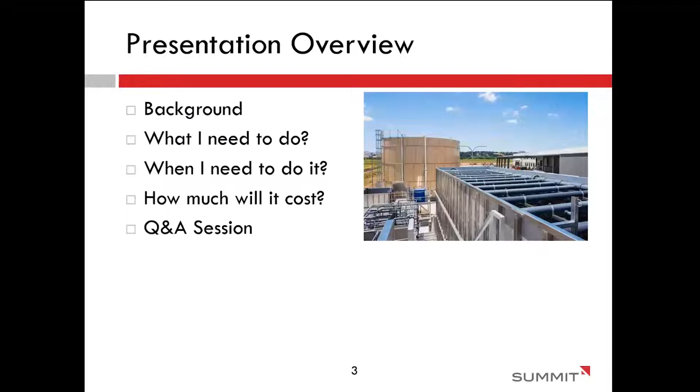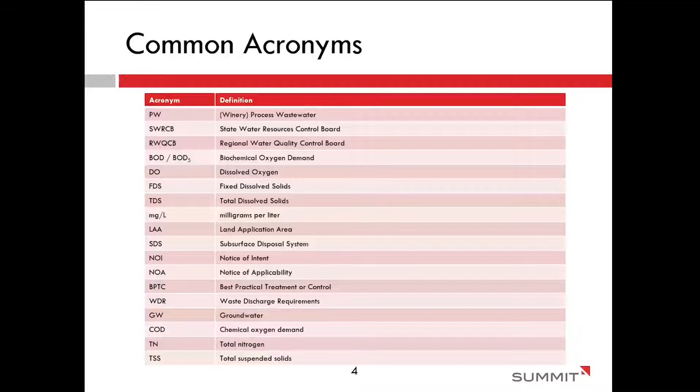So to start, one of the biggest things with understanding the impacts of this general order is knowing where you fall within the tier structure that the state has defined. So facilities need to have a good understanding of what their annual wastewater production volume is, whether that's calculated based on production volume, whether it's measured with flow meters. Somehow we need to define what that annual PW generation is or is going to be in the near future.

So the state has broken up the tiers into 4 different tiers with the addition of an exempt category. So if you produce less than 10,000 gallons of process wastewater each year, you're exempt and do not need to enroll in the general order. And then depending on if you're tier 1, 2, 3, or 4, that will define what your compliance might look like, what your monitoring and reporting will look like. So we need to get a good handle on what category you'd fall into.

Keeping in mind that your process wastewater volume also needs to include stormwater collected and sent to the wastewater system. The state wants to look at that cumulative volume of wastewater and stormwater. If you don't have flow measurement for all of the wastewater going to your pond or your subsurface system or to land application, we will need to understand where you're collecting stormwater so that we can estimate those volumes and help classify which tier you're in.

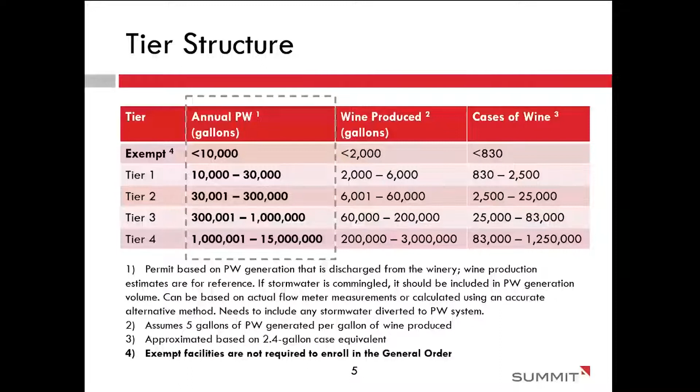And just emphasizing here that the state is only interested in the wastewater volume, right? But we've added columns on this slide to show the correlation to wine production and cases of wine, because most winery facilities talk in terms of wine production and/or cases of wine.

So the next few slides, I'll talk about the typical type of wastewater systems that are regulated by this general order. So many facilities have existing ponds. I don't see as many new ponds going in, but they are still a feasible treatment option.

So for pond systems, the state is looking for us to determine the pond capacity and show what the capacity is by means of a water balance. So they want us to look at wastewater generated, evaporation out of the pond, precipitation into the pond, and just the overall wastewater water balance to determine if your pond has the capacity to accommodate a 24-hour 100-year storm and can handle the wastewater influent into that pond.

For existing ponds, the state will allow tier 1 and tier 2 facilities to maintain their ponds as is. If you fall into tier 3 or 4, you'll need to demonstrate that your liner meets permeability specs. If your pond was installed less than 10 years ago, you could provide construction drawings, geotechnical information to demonstrate that you meet that requirement. Otherwise, they'll require a performance test if your ponds are older than that. So you'll have to do geotechnical boring testing if you have a clay liner or perhaps a concrete liner.

Synthetic liners, if you have a synthetic liner that's greater than 10 years old, you'll need to show that the liner is not leaking. For new ponds, similarly, you'll need to demonstrate you meet that storm capacity, the 24-hour 100-year storm, and you'll need to show that you're meeting the liner requirement with clay, concrete, or a synthetic liner.

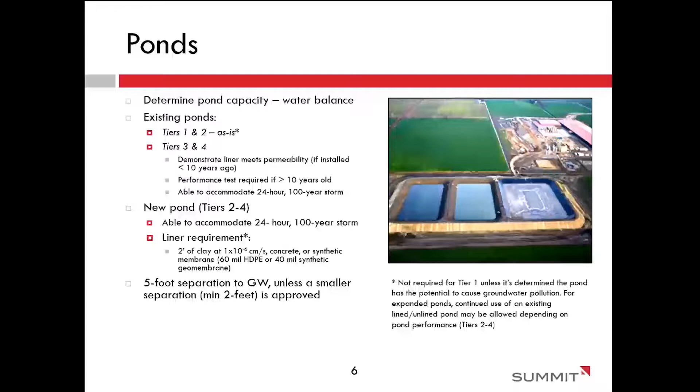So from a pond or from a package system, or possibly for some facilities, you may go straight to land application. So land application areas are regulated by the general order, and the state does not have any specific hydraulic limits. They just ask for good irrigation practices. That's kind of an ambiguous term, but in our technical report, we'll need to demonstrate what the irrigation practice or cycle is for your land application area.

You know, what's your total acreage? How is it split up? How many days will it take to cycle through irrigation of your entire land application area? What the state is looking for is that you're meeting the BOD loading criteria and that irrigation cycle average limit is no more than 100 pounds per acre per day.

One of the interesting things with the requirements of this order is that in a lot of cases, if you have the land area, you can irrigate raw winery influent on land if you're spreading it out over a large enough area. However, you need to demonstrate that it's not ponding or running off, it's not creating nuisances. And in many cases, that wastewater is used for irrigation of vineyard. And so while it may be allowed by the state, it's not necessarily best practice from a vineyard irrigation and health standpoint.

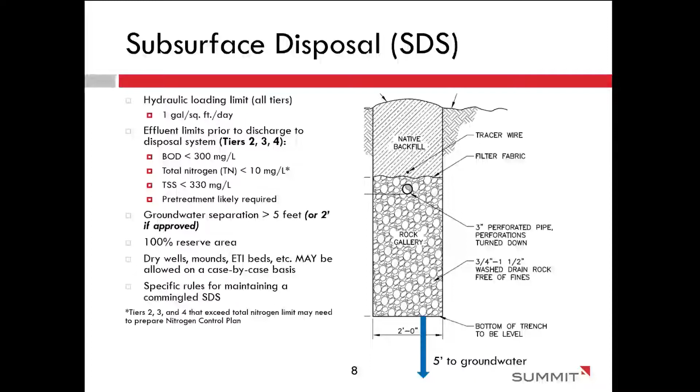What do you need to do? So there's a series of things that we would recommend you do to prepare for enrollment. So the first thing we'd recommend is collecting wastewater generation and water quality data. So you can do that by means of installing flow meters. We can help you determine where you should put in a flow meter so that you can better track your wastewater generation rather than have it be based on estimates, because every facility has different processes and water use goals, or just people operate their facilities differently.

And so having data that demonstrates what your actual usage is going to be the most useful for determining what you need to do to comply and which tier you'll fall into. Similarly, collecting water quality data up front to know what the implications are is a recommendation of ours. It's not a requirement by the state, but that way you can go into enrollment with your eyes wide open about what this looks like for your facility. And I'll go over some more details in another slide. Tier determination, like I mentioned previously, it's tied to your production, not your entitlement.

So if you are producing half of what your entitlement allows, you will only need to demonstrate your wastewater generation tied to your current production.

The next step, aside from collecting data, is to assess the capacity and compliance of your pond, your LAA, or your SDS. And we can help with that, looking at the data, looking at existing drawings, coming out and visiting the site to determine, well, how do things look? Where are you compliance-wise with each of those systems and the requirements, and what do you need to do in order to be in compliance and be prepared and budget properly for compliance?

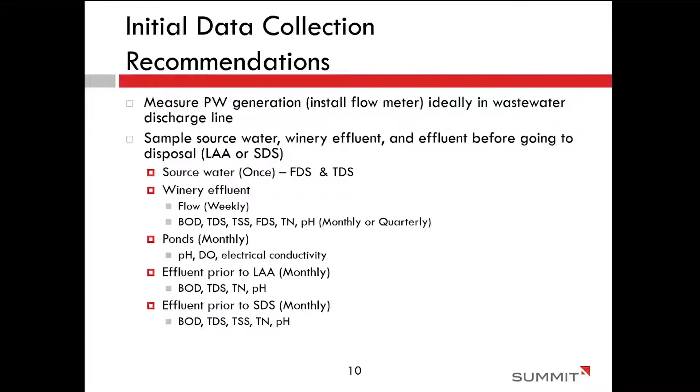Monitoring wells are another big component because the state is asking for us to speak to the groundwater quality, and we can't do that if we don't have monitoring wells. So most facilities likely don't have monitoring wells, and so there's going to be a portion of compliance that requires installation of these wells. And so how many and where? That's going to help you understand what the costs are. How many and where is going to be dependent on the type of system you have, how big it is, what the topography is like.

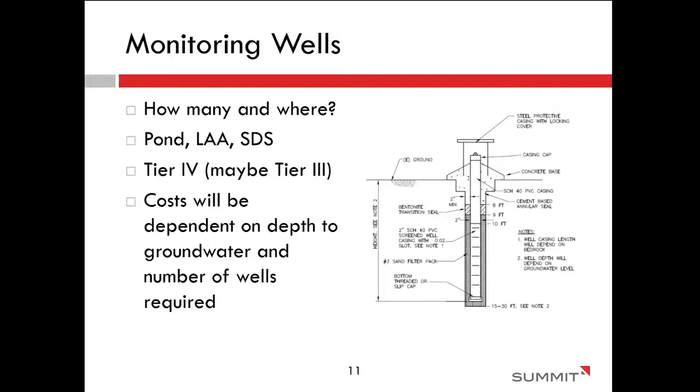So again, reach out to us with specific questions and we can look at your site and the layout and give recommendations on how we think the state will interpret the monitoring well requirement. And if you'll need 2, 3, 4, we can look up what the theoretical depth of groundwater is if there isn't geotechnical information, to better understand and give you estimates on what the cost to install these wells will be.

When do I need to do it? So that is the big question for a lot of people. So if you're an existing winery, you don't have any waste discharge requirements or any existing permits through the county or state for discharge of your wastewater, you need to submit an NOI and technical report by January 20th, 2024. And then your technical report must address how you're going to comply with this general order within 5 years of the state issuing the notice of applicability.

If you're a facility that has an existing WDR or a conditional waiver or a permit through Napa County, a local permit through an MOU, you need to submit your NOI and technical report by expiration of that existing WDR. If you have a permit through an MOU, that's a little ambiguous because you're renewing that permit annually. So I don't know if the state has clearly defined, does that permit expire annually, or how are they going to interpret that? I think that they have a lot of people they need to get enrolled before they come after the people that have those annual permits. But just letting you know that the requirement for enrollment of facilities, specifically in Napa, is a little bit ambiguous.

And kind of going on a segue, per Kim Withrow, the state and Napa County are still working out their MOU. The state has issued a draft MOU to Napa County. They provided comments and now they're waiting for the state to come back to them. So Napa County still has the intent of being the local jurisdiction or providing oversight for implementing the general order. And so they're going down that path, but as most things within the state, it's just taking a while.

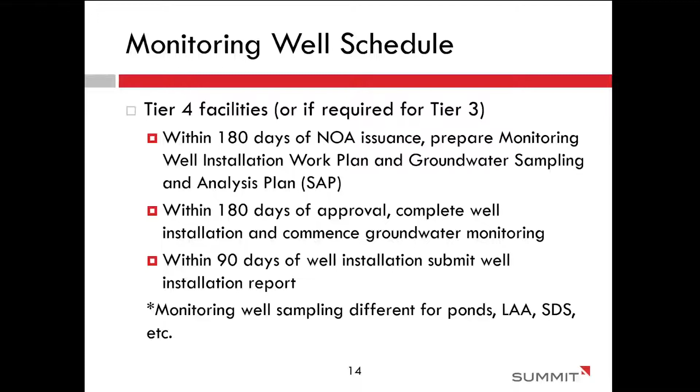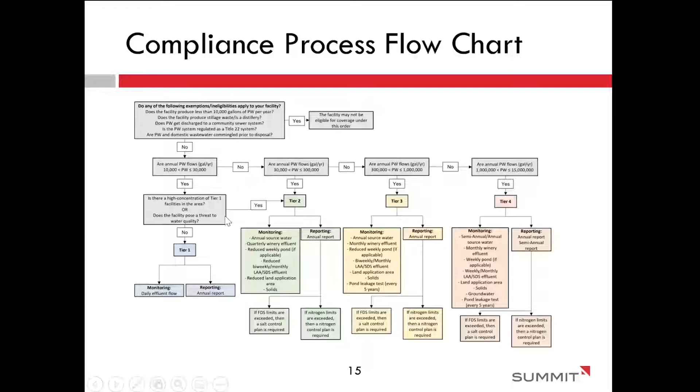Okay, salt control plans. So this will be a requirement potentially if you are showing exceedance of FDS, and it applies to land application areas or subsurface disposal systems. So this new general order prohibits water softener regeneration brine from being discharged to your LAA or your SDS. They do, however, allow RO or boiler blowdown backwash to go to the wastewater system because it's not providing additive salts that are then getting into groundwater.

As part of the technical report and ongoing monitoring, you'll need to demonstrate that your source water plus your effluent is not adding more than 320 milligrams per liter of FDS to your source water, and you'll have to monitor that 2 times per year. And then if you do have exceedances of FDS, then this may trigger a salt control plan within a year, or you'll need to demonstrate that you're involved in another sustainability program or CV Salts.

CV Salts is a program within the Central Valley because of their groundwater and salt and high TDS level situation. So CV Salts would only apply to facilities in the Central Valley. But if there become other sustainability programs in other regions of California, that could be an option.

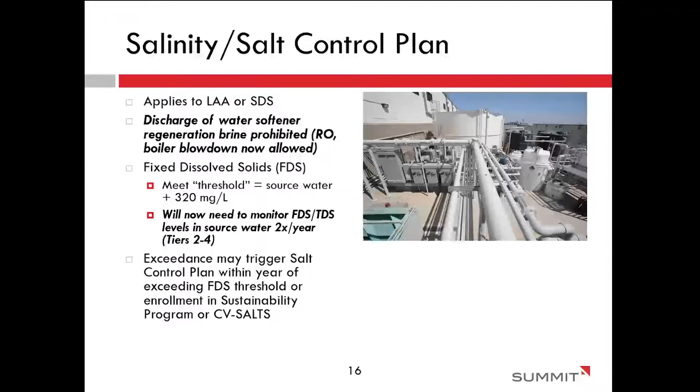Similarly, nitrogen. So there are nitrogen limits on the effluent that's sent to land application and subsurface disposal systems for tiers 2, 3, and 4. Your nitrogen levels in an SDS system need to be less than 10 milligrams per liter. And for LAA, if there is a demonstrated impact to groundwater, then you may need to prepare a nitrogen control plan for an LAA.

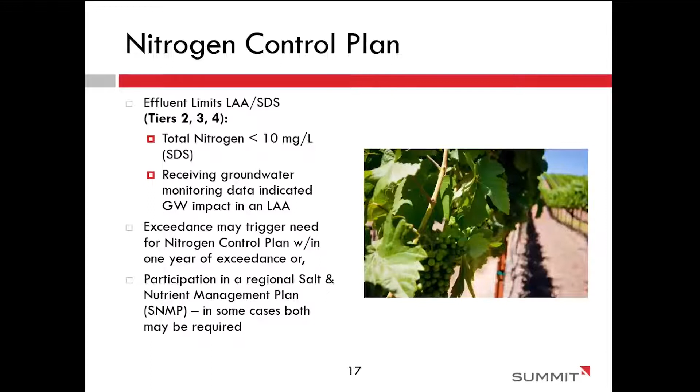Similarly to salt, if you do have an exceedance, an alternative to the control plan would be participation in a regional salt nutrient management plan. But at the present time, I'm not aware of any of those.

Compliance-wise, these are kind of the steps for compliance. You submit an NOI and a technical report. The state is supposed to respond within 180 days. We'll see once people start applying what that actual response time is. Once the state responds and hopefully issues their notice of applicability in response to the application, they'll provide the tier determination, they'll provide the monitoring and reporting program, and then they'll provide an approval on your timeline for compliance.

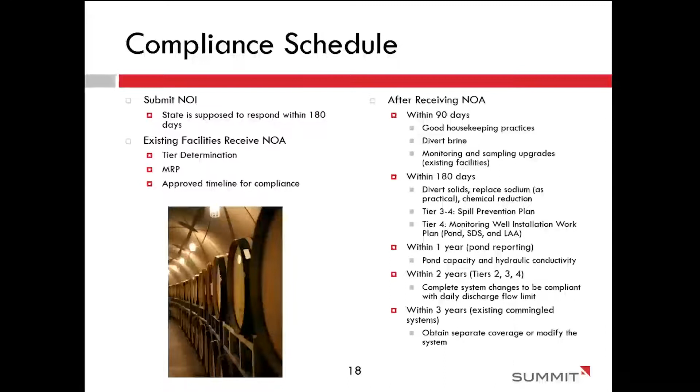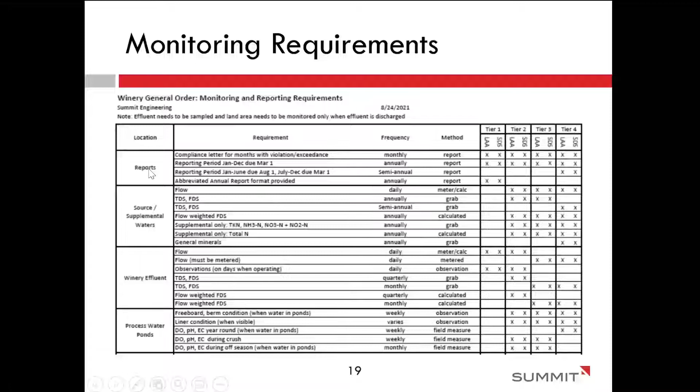In general, monitoring and reporting. So for groundwater monitoring, if you are tier 3 or tier 4 and you want to request an exemption because you can demonstrate you're not degrading groundwater quality, you need to include that request in your application. Overall reporting. So if there's an exceedance of some kind, you'll have compliance letters. Otherwise, you'll have semi-annual reports for tier 4 and only annual reports for tiers 1 through 4.

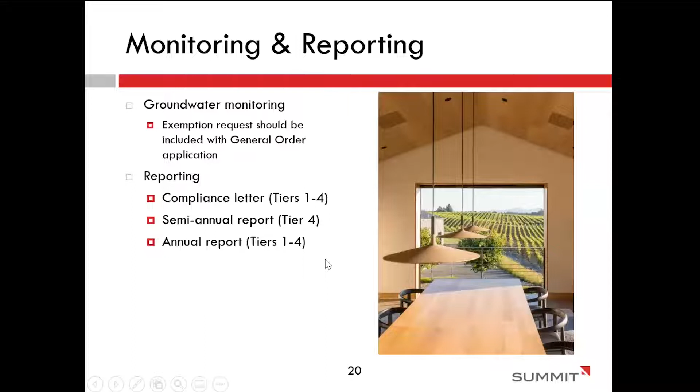How much will it cost? I think everybody is interested in how much this will cost because it's pretty substantial in a lot of cases for facilities. So the costs include capital improvements. What are you going to need to do to improve your system to be compliant? Monitoring well installation if that's needed.

We can help put together estimates for all of the capital improvements, including groundwater sampling preparation. And the reason we included the groundwater sampling in a capital improvement is because it's an investment ahead of the O&M side. It's getting a handle on what your water quality looks like. And so that's an investment in capital in terms of getting a handle on what your water quality looks like.

And then of course, there's the operation and maintenance costs. So what are the costs going to be for your facility to do all of this monitoring and sampling, and then the reporting? Noting that in future slides, I'm going to give a couple of case studies and examples, but those case studies on the O&M side do not include the cost of labor to operate or maintain a system. It's strictly related to compliance with the general order in terms of monitoring and reporting.

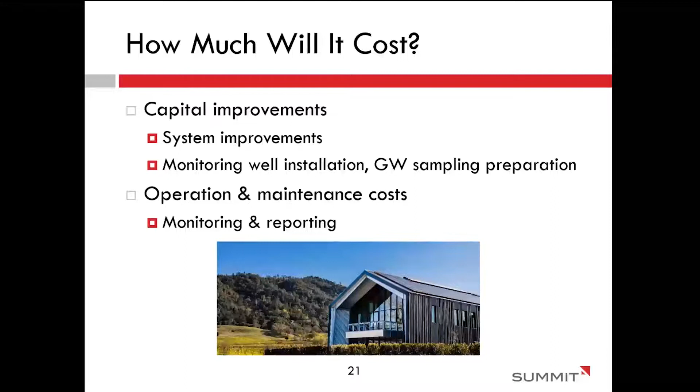But it is a consideration: for putting in a package system or a pond, there are O&M labor costs that will need to be taken into consideration because they can be more substantial if you don't have somebody in-house that can do that. So here's the first example.

We have a facility that has an existing subsurface system. They're a tier 3 facility producing 100,000 gallons of wine, equivalent to about 600,000 gallons of process waste. Their daily flow is 2,500 gallons per day. Again, an existing SDS system. So the system improvements that they would need would include a pretreatment system, and this could be one of many things. We've given a few examples here.

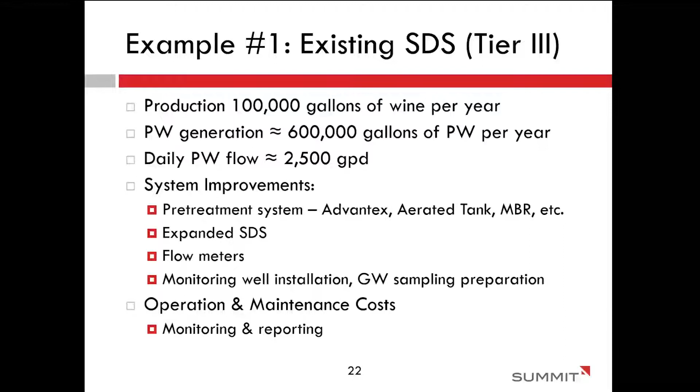They'd need to expand their SDS system. This might not be the case for all, but in going through the hydraulic calculations, we discovered that they would need to expand their system. There's the installation of flow meters and then the monitoring well installation. And then there's the O&M monitoring and reporting associated costs. So this is a table showing what all of those costs might be.

I want to note that for this one, there's a huge range for the pretreatment units. In this case, we looked at an AdvanTex AX-Max. It's a textile filter for pretreatment. And depending on the loading for the pretreatment system, there's a huge variance in what that pretreatment cost might be. And so the cumulative cost to improve the system to be in compliance is $666,000 to almost $1.5 million.

It's quite substantial. And then there's the potential cost for all these additional plans that we've noted on the right over here. For a facility that has a pretreatment system like this, we've calculated and estimated what the monitoring and reporting costs would be. And again, it's substantial, $25,000 to $33,000.

So one thing to note that I had mentioned previously is if you're providing a pretreatment system just to go into a subsurface disposal system, it might make sense to use it for surface irrigation and have a beneficial reuse rather than put it subsurface and have an area that, people often don't like their leach field systems in the vineyards. And so perhaps you can get away from that type of a system.

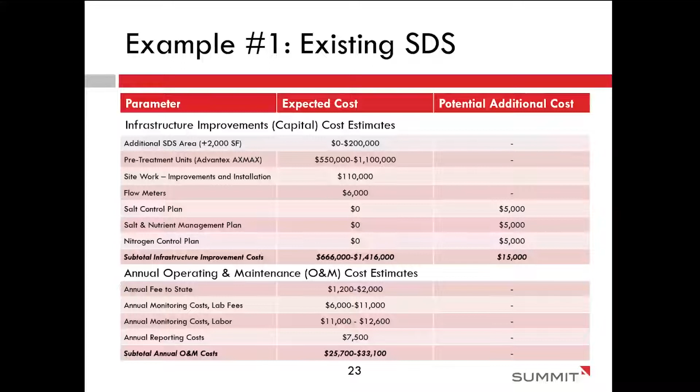Here's a second example. So a facility has an existing pond, they're tier 4, they produce 1.26 million gallons of wine. They're bottling juice on site. They have a generation of 3.5 to almost 5 million gallons. There's a typo, of PW per year, and their daily flow is 40,000 gallons per day. This facility has 4 ponds that have a total of 11 million gallons of pond capacity, and they have a pretreatment system already.

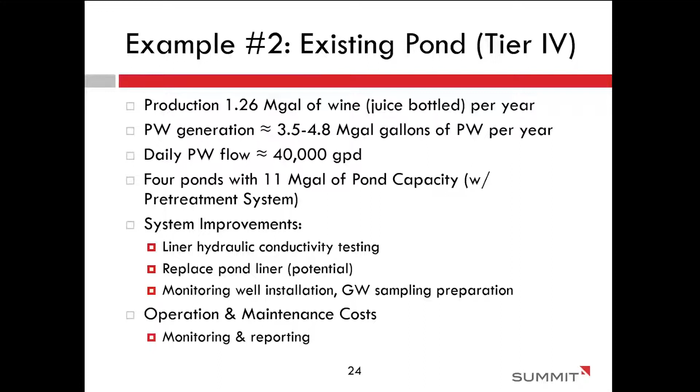So in looking at this facility as an example, they would need to do liner hydraulic conductivity testing for their 4 ponds, likely replace their pond liners, and then do the monitoring well installation around their ponds and in their land application area. And then there's the O&M costs associated with monitoring and reporting. So here's the breakdown of potential costs.

So to put in the pond monitoring equipment, do the conductivity testing, and install the groundwater wells, we've estimated $350,000-ish for that investment, with the potential of $1.5 million to replace the pond liner. And that includes desludging the ponds, grading prep for the ponds, lining the ponds. So if those ponds do not pass the hydraulic conductivity testing, there's a huge capital investment.

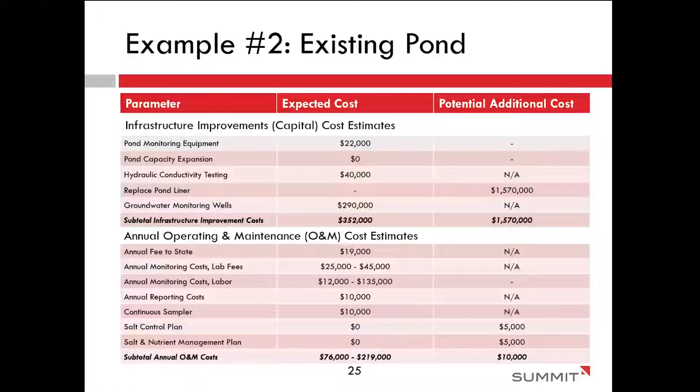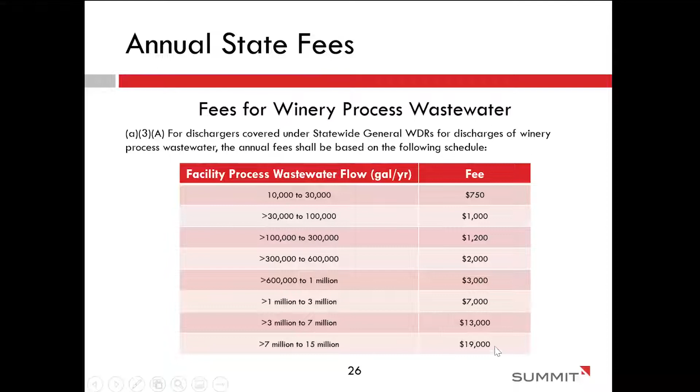Annual state fees. Since the last webinar, the state has published the fees for the winery general order, and it is based on the volume of wastewater generated. So you'll see here that it ranges, depending on your annual wastewater generation, from $750 up to $19,000 per year.

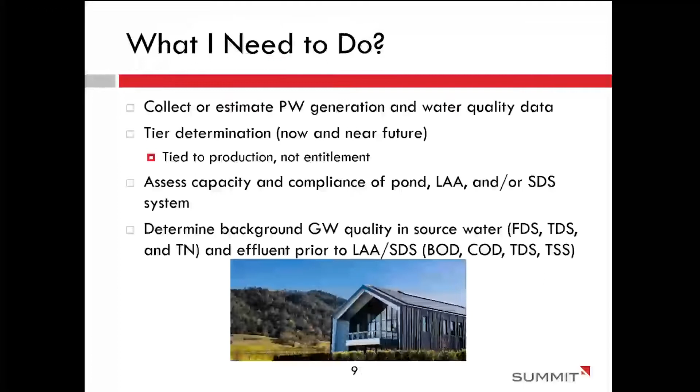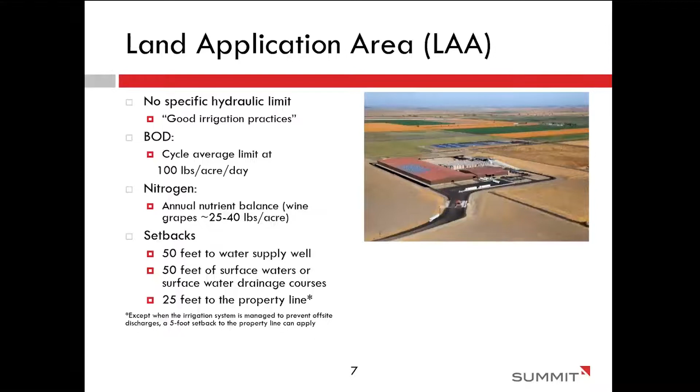Okay. Will a winery facility with a notice of non-applicability be impacted in the same manner by the general order? Different general orders. I think a notice of non-applicability is for stormwater, and this is specific to wastewater, winery wastewater. So if you are generating winery wastewater and you are discharging to land, or it's going back into the ground via leach field or other means, then you will need to be compliant with this general order, irrespective of that NONA.

Okay, this question is specific to Sonoma County, but I would imagine other people have similar thoughts. The question is whether Sonoma County has weighed in on whether or not they will allow hold and haul of processed wastewater, thereby allowing the facility to be exempt from the general order. Good question, and we're still working on it. We're trying to get them to allow it because Napa County allows it, and I think it would make sense for a lot of facilities rather than invest a lot of money in infrastructure just to be compliant. So the short answer is no, but not yet.

And we've been in contact with Tennis Wick. I know the Wine Institute's been involved in that discussion. Kendall Jackson's been involved with that discussion with Sonoma County to try to get them to amend some really antiquated code language.